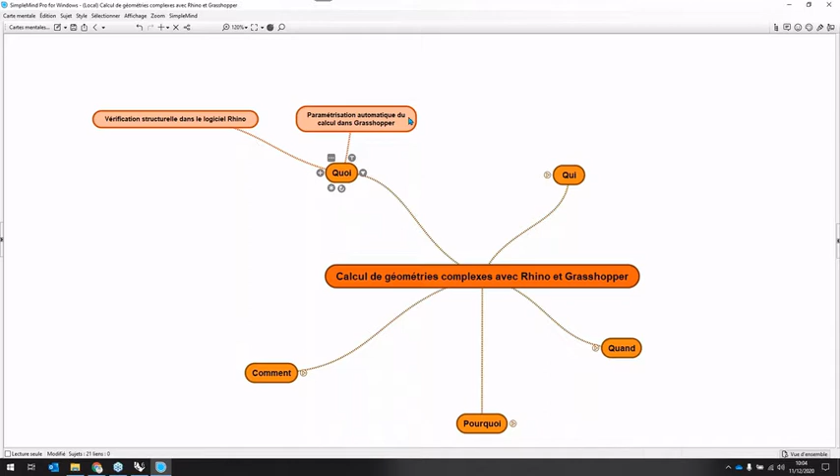On parlera aujourd'hui de Rhino et Grasshopper, donc la vérification structurelle et la modélisation dans Rhino, et les possibles paramétrisations automatiques pour le calcul dans Grasshopper.

À qui ça s'adresse? Ça peut s'adresser autant aux projeteurs, architectes, ingénieurs structure. Il n'y a pas vraiment de limite sur les différentes personnes qui peuvent l'utiliser. Autant pour la partie conception, par exemple pour l'étude de viabilité des structures, qui peut être assez intéressant, surtout avec les possibilités qu'offre Grasshopper.

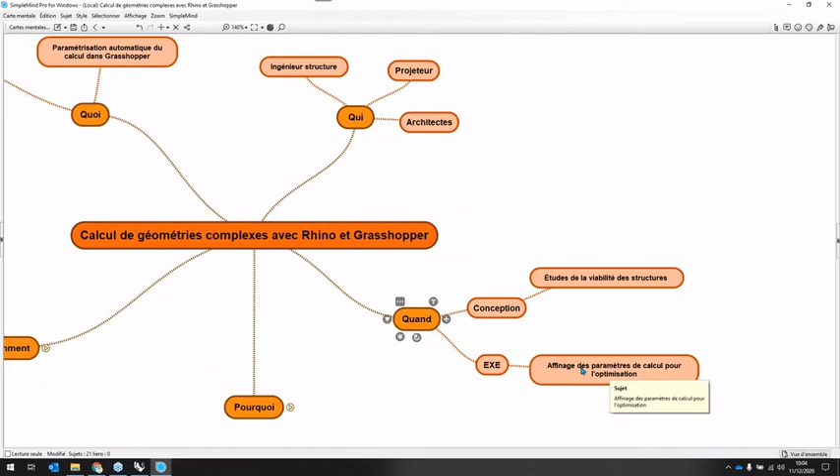Et en exécution également, souvent on le voit avec certaines passerelles, notamment avec Tekla, pour justement pouvoir envoyer jusqu'à la fab. Pourquoi? Souvent, comme on le sait, avec les logiciels de calcul, les modélisations des structures complexes peuvent être assez compliquées à réaliser des fois. Donc, certains outils comme celui-ci, qui sont surtout des outils de modélisation, peuvent faciliter ce processus.

Et pour la partie Grasshopper, de pouvoir souvent régler certains paramètres de calcul, notamment, comme on le sait tous, pour certains dimensionnements, surtout avec l'eurocode, on a divers paramètres qui interviennent. C'est bien d'avoir une certaine visu de l'impact de ces différents paramètres sur le calcul. Donc, ces deux choses peuvent être intéressantes pour le calculateur et pour le projeteur.

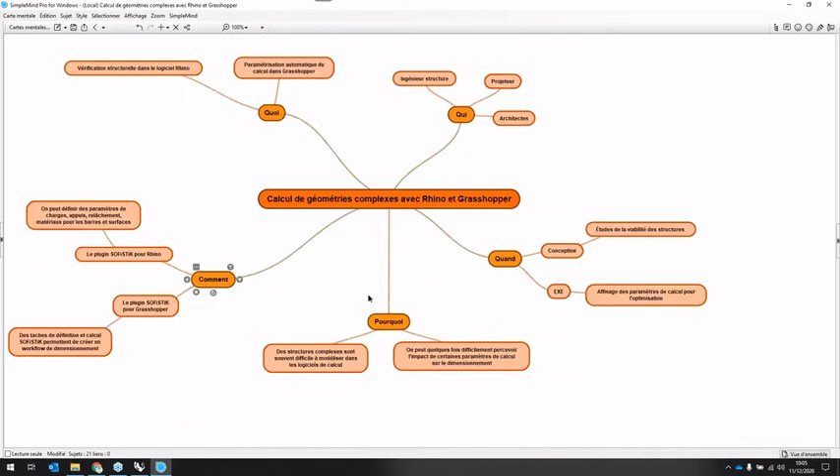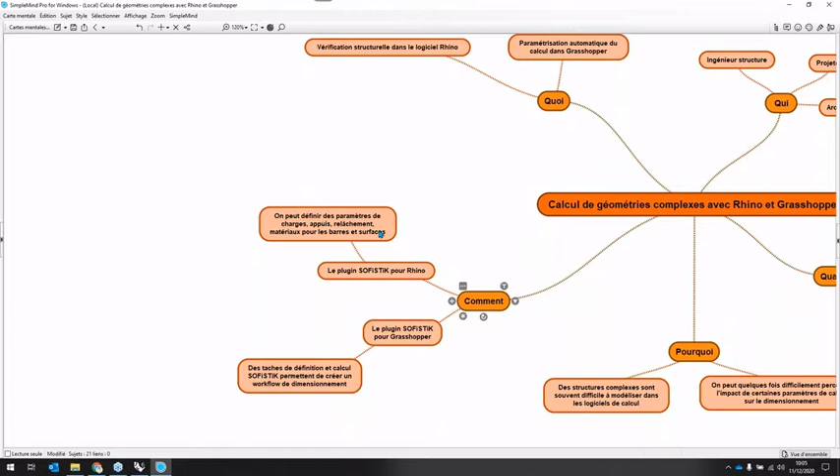Donc, ce qu'on va voir aujourd'hui, c'est comment le plugin SOFiSTiK intervient pour vous permettre de définir les appuis, les relâchements, les matériaux, donc les paramètres de calcul dans Rhino. Et également, dans la partie Grasshopper, que Xavier va vous expliquer un peu à la fin, comment certaines tâches ont été créées par SOFiSTiK pour faciliter cette démarche-là.

Juste une petite intro de Rhino Grasshopper, je ne sais pas si vous connaissez. Donc cette partie de l'écran, ça c'est Rhino, et ça c'est Grasshopper. Grasshopper, c'est un peu comme le mind mapping que je montrais, c'est un peu dans le même principe. Donc, pour faire vite montrer, si je change un paramètre ici, ça a un impact sur l'écran ici.

Ce que vous voyez là, c'est le ruban SOFiSTiK pour le calcul. Vous pouvez lancer cette géométrie-là directement dans le calcul SOFiSTiK. Ici, ce que vous voyez, c'est un peu l'écran de modélisation. Et là, vous avez un ruban qui suggère que vous pouvez définir les appuis et les différentes barres en section.

Donc ici, vous réglez le maillage, les différentes sections, les différentes propriétés surfaciques, etc. Et vous lancez le calcul vers SOFiSTiK. Donc c'est aussi simple que ça. Voilà.

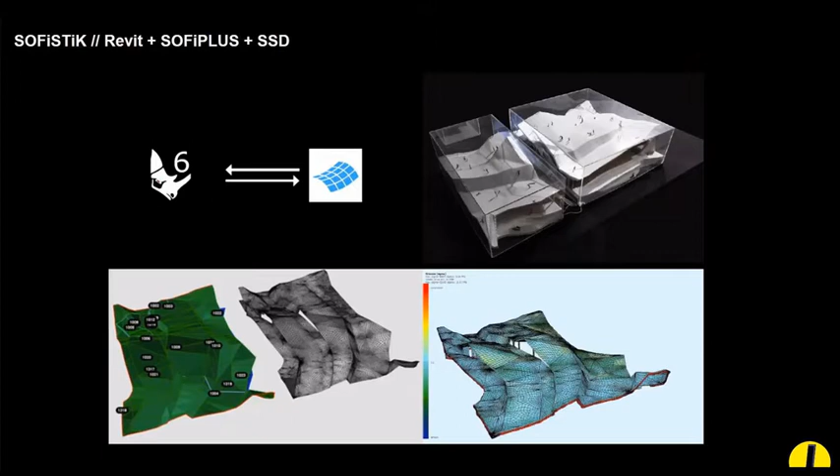So for the research part, we've gone through, first of all, Revit and SOFiPlus and SSD, and also integration between Revit and SOFiPlus. After that, we also integrated some complex geometry from Rhino and Revit and analyzed it in SOFiSTiK, because some of the complex geometry is difficult to analyze in Revit.

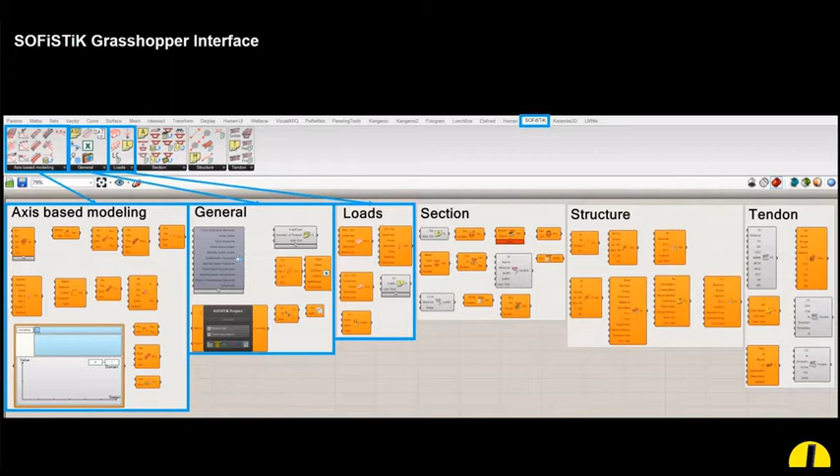After that, we jumped into Grasshopper components, and it developed quite a lot. As you can see, we now have about 6 major component sets that you can use to analyze from building scale to bridge scale. Grasshopper is like a Rhino interface where you can parametrically manipulate the geometry. Here I used an early stage Grasshopper component from SOFiSTiK, from 2018, April.

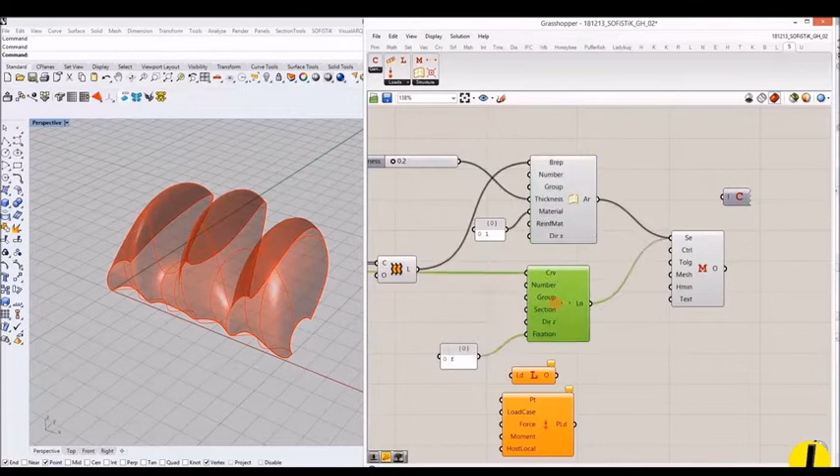So this standard Grasshopper geometry can be converted to an analytical model for SOFiSTiK with these components. As you can see, the Grasshopper geometry surface can be converted to a structural area, and we can define the thickness, give a group name or member number, and also define the support and member definition from Grasshopper. Here Grasshopper is really flexible - in real time we can manipulate geometry and define different parameters. It's a so-called parametric design tool.

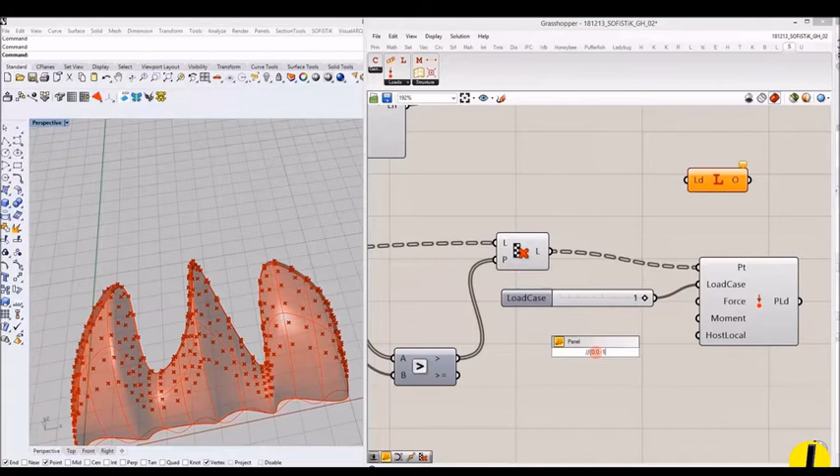Here I'm defining from those sets of points on a surface the lowest points on the surface so that we can get the support condition for SOFiSTiK. I'm filtering the points, and on one of the points I'm defining a load, then keep manipulating the geometry. After that, all this data can be transferred to SOFiSTiK's format, and we can insert the task in SSD, defining the design code, and define material and members. Here in Grasshopper we can assign it, and the exported extension format can be imported in SSD. With a text format, we can type 'include' and then the same file name in the same directory, and then you can calculate the geometry from Grasshopper.

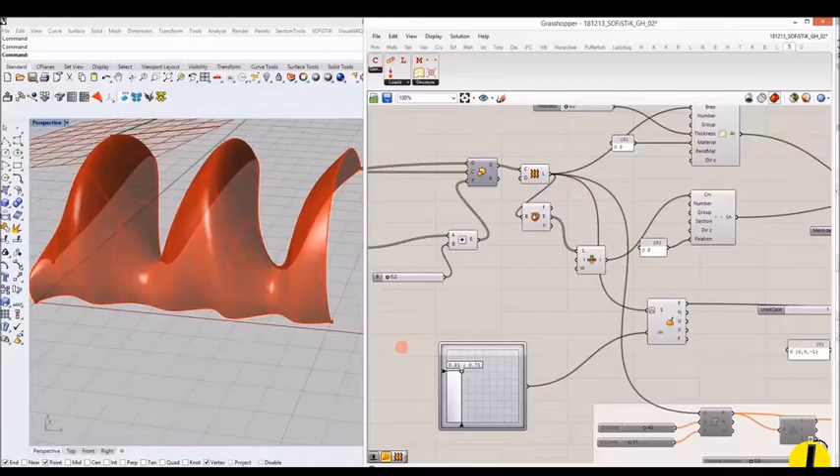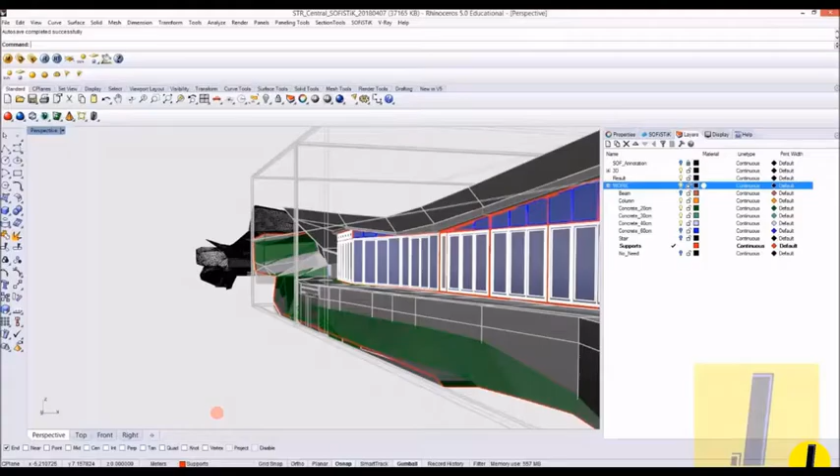At that moment I just gave a simple dead load, but we can also define point loads, and obviously define all kinds of flexibility using text input in SOFiSTiK or Grasshopper for different load case definitions. In this case, the model is very complex - it's my university project from 2016. I wanted to calculate it actually through Revit, but it was kind of impossible to do. So I decided to do it in Rhino and then get the analytical model, and through SOFiSTiK we could analyze it.

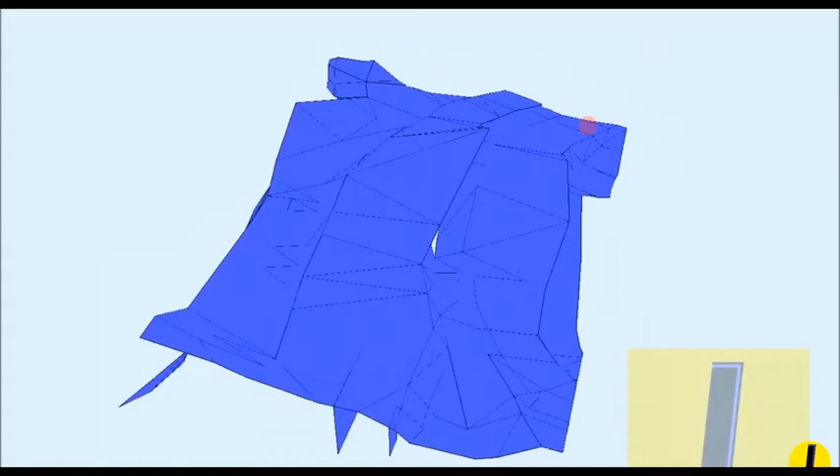I'm an architect, so I'm not really an expert in structural engineering, but at least I could see where the biggest deformation was when just applying dead load, and I could think about some design options to go further. So I think it's important to collaborate with a structural engineer as an architect, because otherwise we cannot achieve the architectural proposal we wanted to design. That's the reason why I started this research into parametric structural engineering. And SOFiSTiK was really good because I could get all this result very quickly from Rhino.

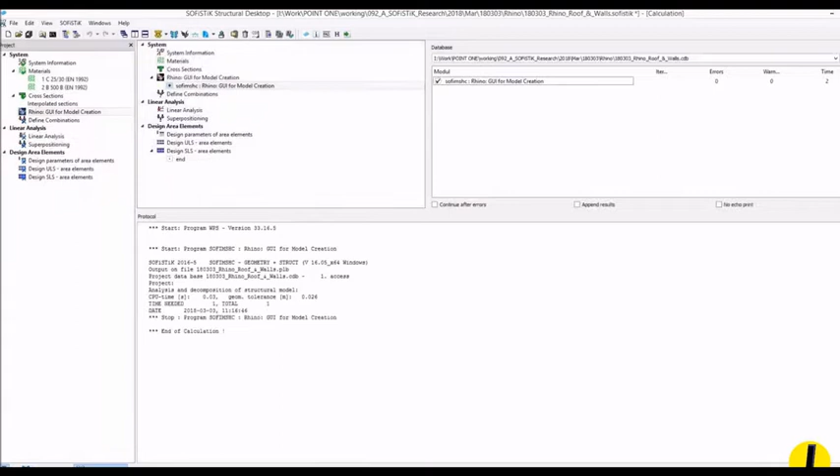In this example here, I have an analytical model from Revit, and this purple area - it was actually very difficult to get this structural analytical model out of Revit.

So I decided to model only that part in Rhino, and then bring the structural analytical model from Revit. We give linking same origin coordinate point from Revit and Rhino, and we link the same coordinates in SSD so that we can calculate both Revit and Rhino's analytical model within SOFiSTiK.

So there's huge flexibility with SOFiSTiK, because you can use multiple platforms such as Autodesk Revit or Rhino and Grasshopper, and you can also use something like SOFi Plus to define complex load cases or more engineering definitions for your calculation.

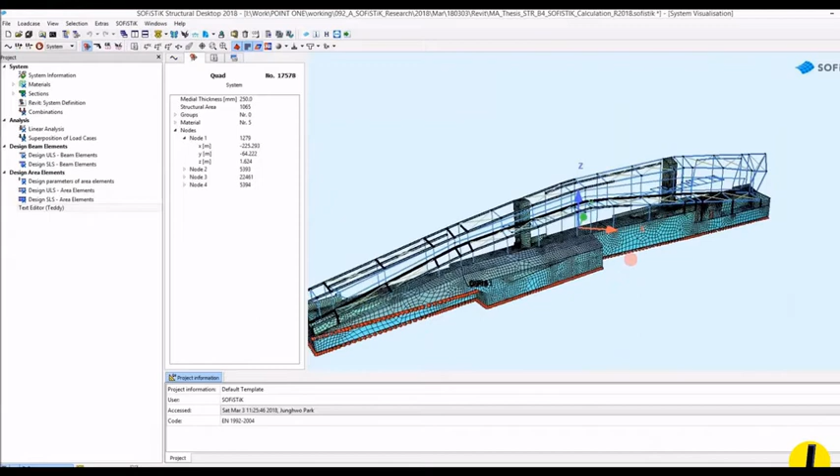The challenge was just to find the coordinate point, but once you thought about this workflow from the beginning, you can actually just link the same origin point between Revit and Rhino, and SOFiSTiK gives you really good results by combining those two different platforms.

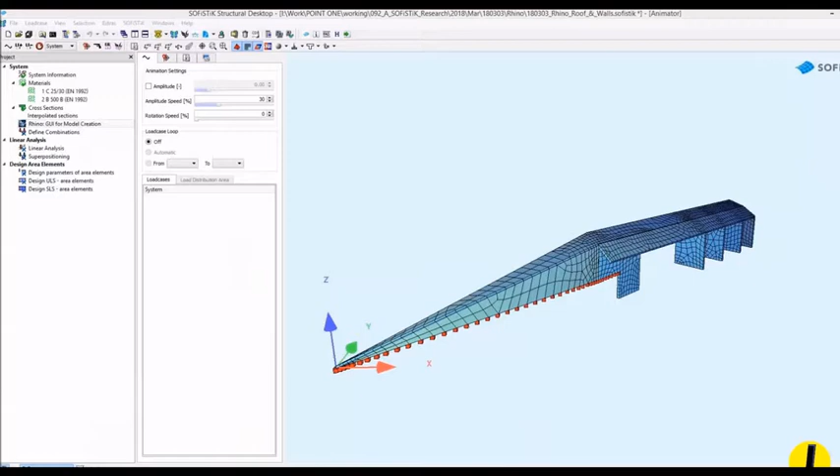And as you know, in Revit we can define more like the members' release condition or fixation, so you can do this sort of structural framing calculation more accurately. And then we summarize all the calculation in SOFiSTiK.

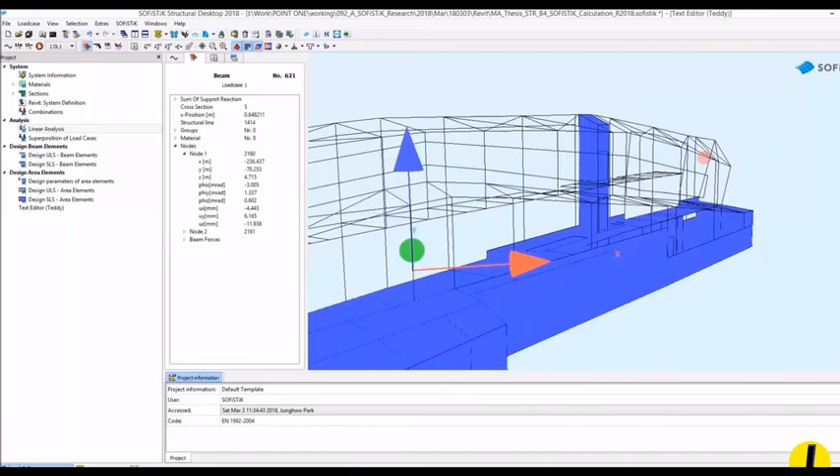So to me it's very interesting. Not only with designing a building as an architect, we can check the prompt result, and we can just definitely send this analytical model or collaborate with a structural engineer together without any difficulties. That was the main purpose of working with SOFiSTiK with Revit and Rhino.

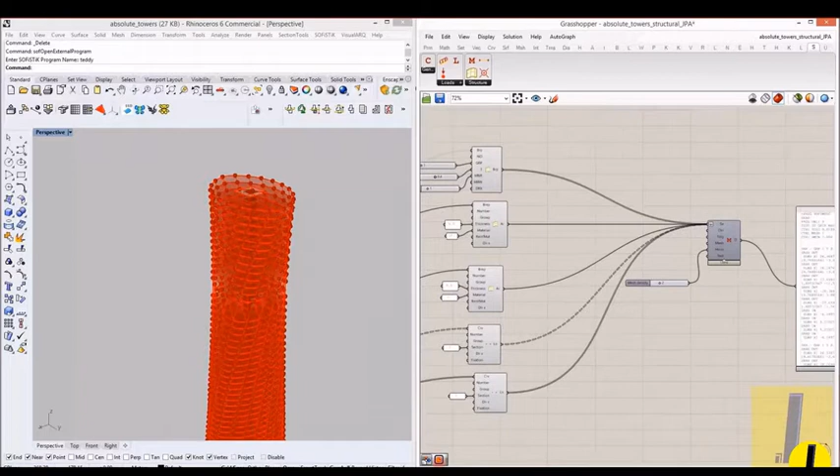So the next one, architects do a lot of conceptual design with Grasshopper. For this tower scheme, we could make this sort of small definition in Grasshopper, and in the SOFiSTiK Grasshopper plugin we just linked it, defined some dead load, and then could calculate it within 12 seconds. As an architect we can quickly revise, okay, maybe the core location there gives too much challenge for the structure.

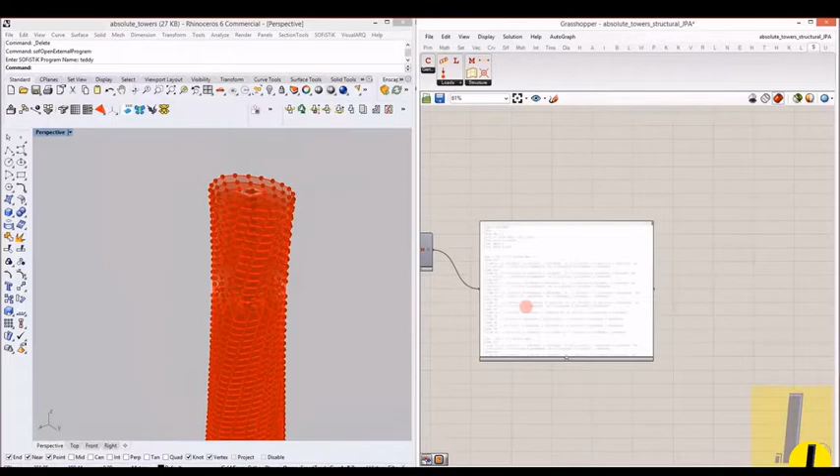Then we can also think about different design options. This is really great because in Grasshopper we can change this geometry simultaneously with a couple of sliders, and this feedback from SOFiSTiK is also fast, we just need to calculate once more, and then we get a completely different result.

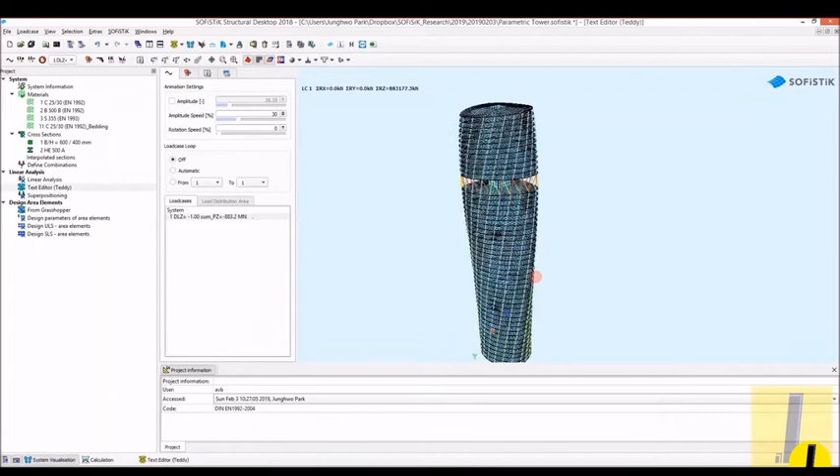So we just shift the core location a little bit and then analyze once more the dead load, and I can get a different sort of structural behavior. It's very rough, but for the conceptual stage, we can also think about that.

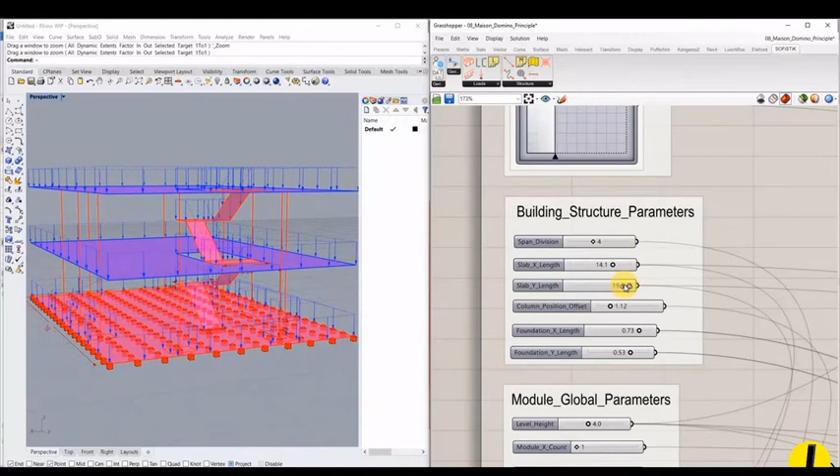And now here I'm introducing Rhino 7. They have this Rhino.Inside.Revit, which means we can parametrically design the building scheme or bridge scheme in Grasshopper, and that analytical model we can obviously parametrically adjust what we need, support condition, footings and stairs, and different building height, or this modular system from Le Corbusier's Domino system, so we can array this building scheme for multiple residential buildings.

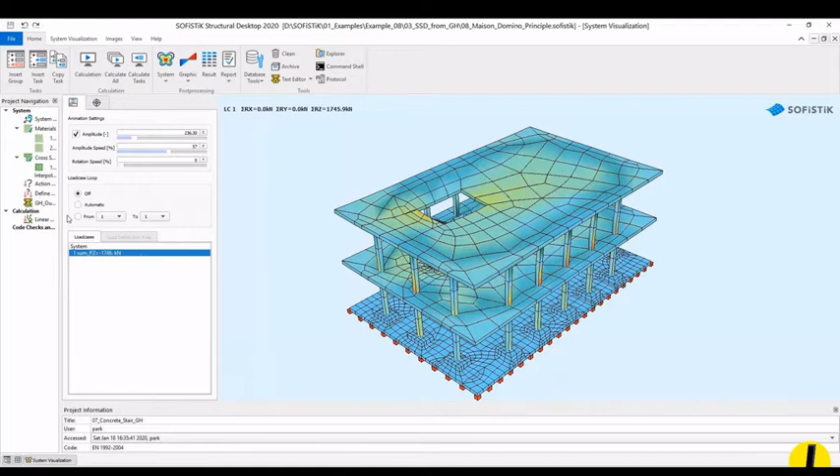And with Rhino.Inside, now the SOFiSTiK result we can also convert to native Revit components. So here I'm going to activate the synchronize file path component for SOFiSTiK, and we can also analyze the result from Grasshopper. I just gave a dead load, so you can see the result, and we can use the normal SSD function for display and visualization.

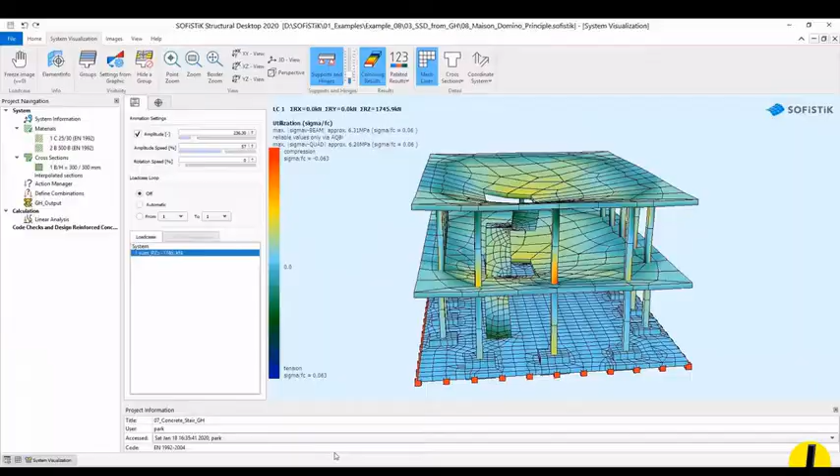And now I'm just going to calculate a modular system as a sort of unit apartment scheme. When I calculate in SOFiSTiK, you can see, so we just need to recalculate this text input and linear analysis, and you can get the whole building scheme in very fast time, and it works really perfectly.

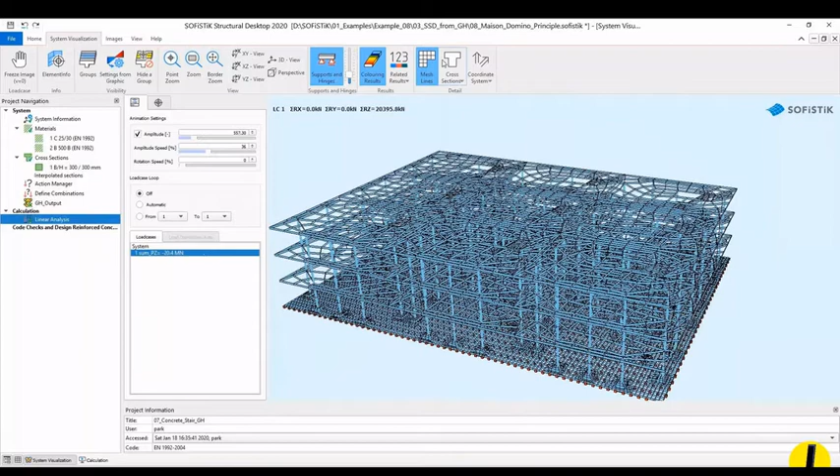So this result, now we can also send it to Revit directly, so the construction team can document the initial calculation model in Revit, like plans and sections.

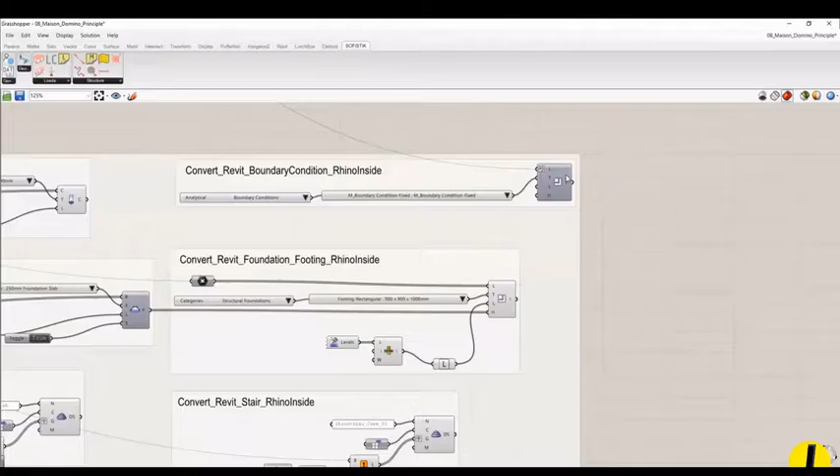So now let's say we're interpolating the geometry from Grasshopper to Revit, and I just recompute, so we remove the error, and you can see we now have whole native Revit components, which means floor slabs and foundation columns, etc., which is great.

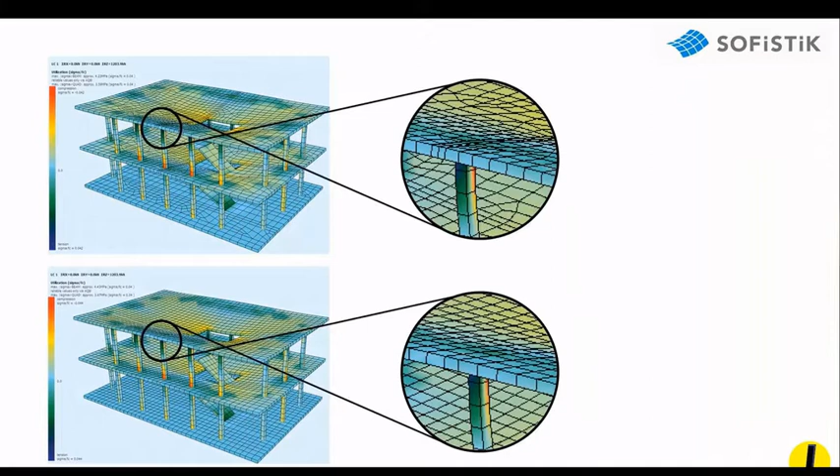And here I had researched that the meshing was a little bit complicated, so we wanted to optimize the meshing geometry out of Grasshopper, so we can have faster calculation speed and also more reliable meshing geometry.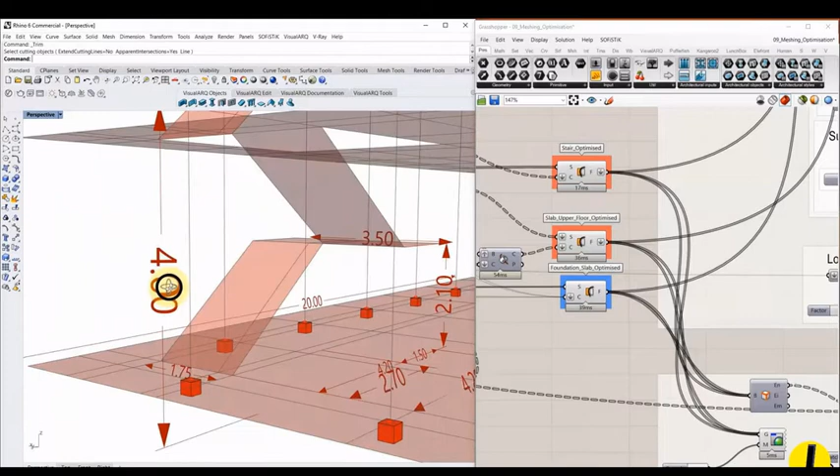The idea is that at any intersection between the geometry, we need to split the geometry. So if you do the automatic option or single quad or regular options, when we split at all the intersection points of the geometry, we can use the regular option so that we have really good optimized meshing geometry. In this case, it's difficult to manually do it when design changes evolve quickly.

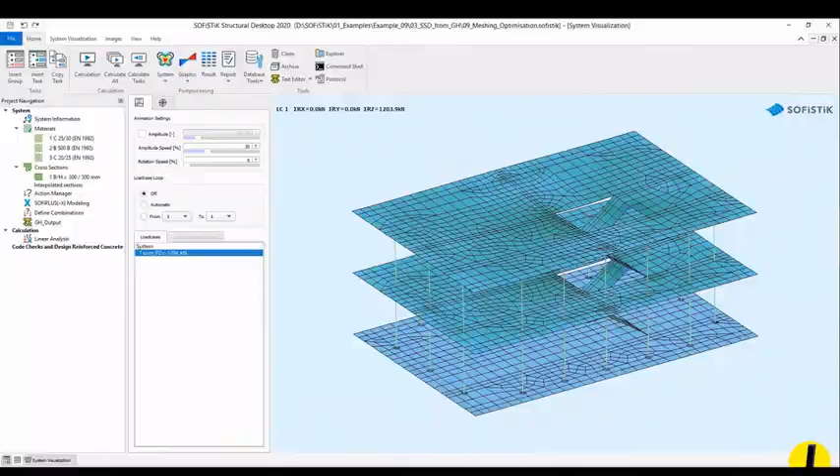With Grasshopper, because of the parametric function and computer-scripted geometrical definition, any changes automatically update. We can have a look at the single quad option instead of automatic quad option, and you can see now the mesh is much simpler, and the calculation speed is really quick because right now we're looking at only one module.

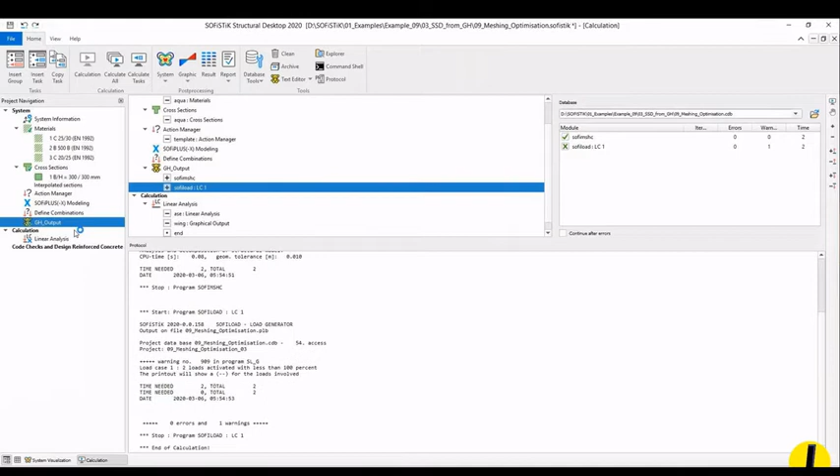So it doesn't take much time for the automatic option, but when you have a bigger scheme, this optimization of meshing could be very useful. I think Grasshopper and Rhino give you really flexible options to optimize this meshing geometry.

So you can see here the regular meshing options. As you can see, the calculation time is also fast, and we can give a bit denser property for the meshing typologies. As you can see here, now we have every 50 centimeters with a quad mesh, so you can see more detailed calculation. But the point is the mesh is really clean.

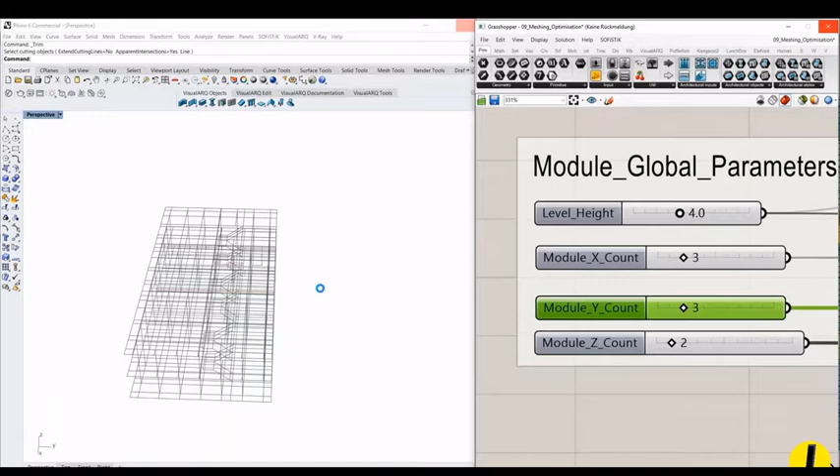Now I'm going to make the building scale bigger with multiple stories. This modular system can be seen where all the intersections split. Now we just do one more time automatic calculation, and you see it still works, but the mesh between the modules is very messed up, not very good meshing geometry.

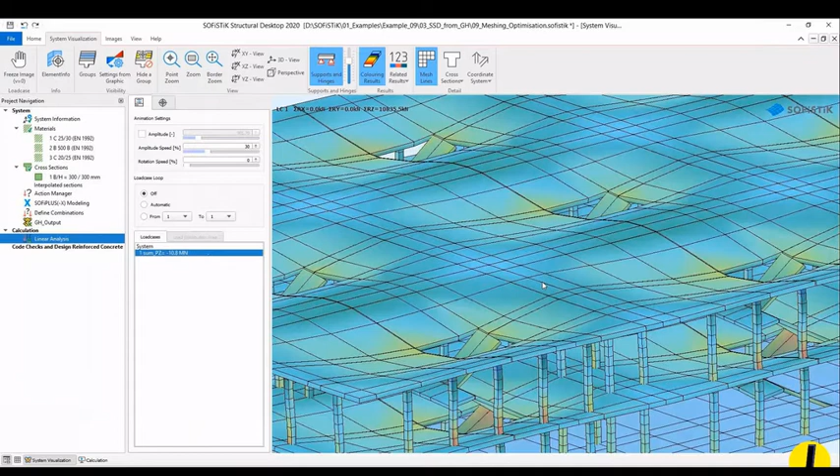But once we make it a simple quad, of course the calculation time is much faster, and the geometry is also cleaner, but maybe the single quad doesn't give you the accurate result.

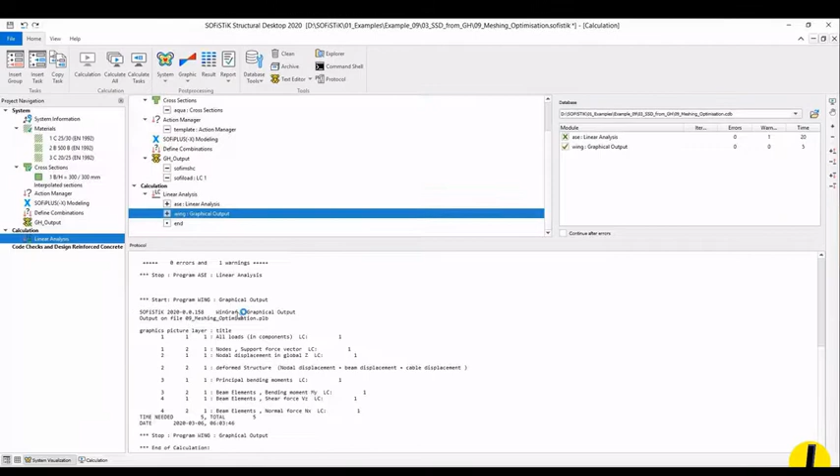So the best option is to use a regular meshing geometry option, and the mesh density we can always control from the Grasshopper component. Now when I recalculate, we get very organized results, and between the junctions you can see there's no such complex meshing drama. So we get a really good result, and also the calculation time is fast.

So now I'm showing some of the projects from Point One Studio. We worked on this steel and timber structure in Australia. The architect was OSC Architects, and we collaborated with them and designed this small single family house.

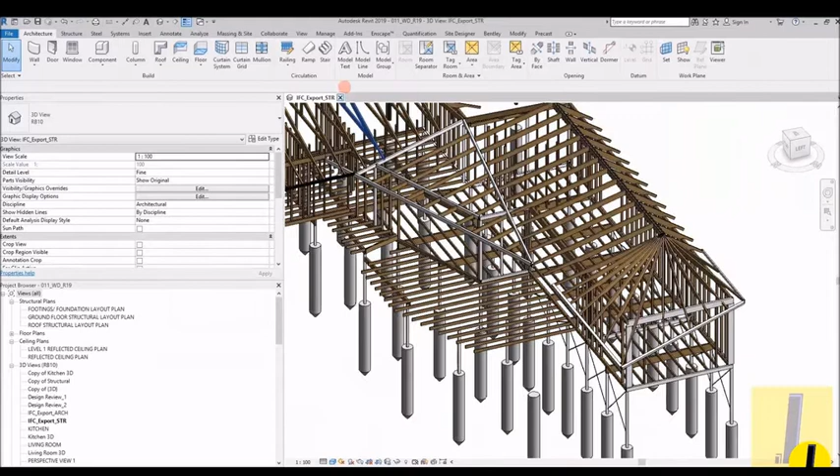At the time I didn't use SOFiSTiK, but I was just thinking, okay, maybe this whole structure we could have calculated at the initial stage in Grasshopper, so we can have more design variation to come up with the final design. So I scripted it in Grasshopper.

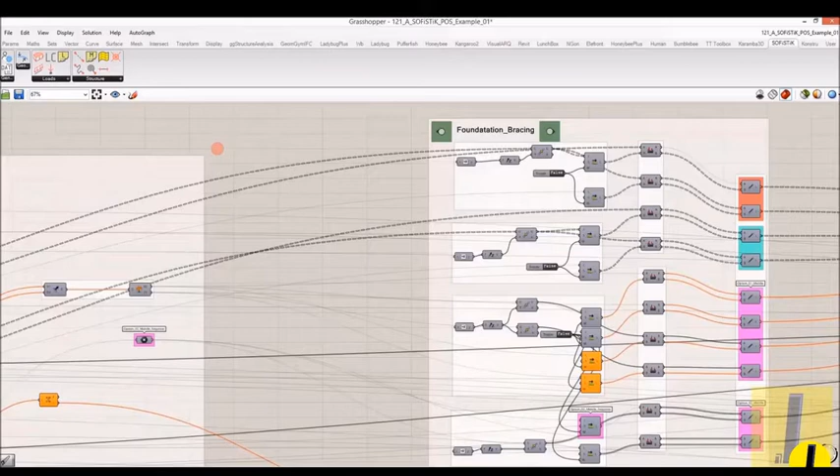As you can see in Grasshopper, we can change all the parameters completely, like the building height, etc. All the data is structured, so for each building component you can jump to the main script to define foundations, and from foundation you can define supports, and organize it graphically. It's just a matter of some organization, but nothing complicated.

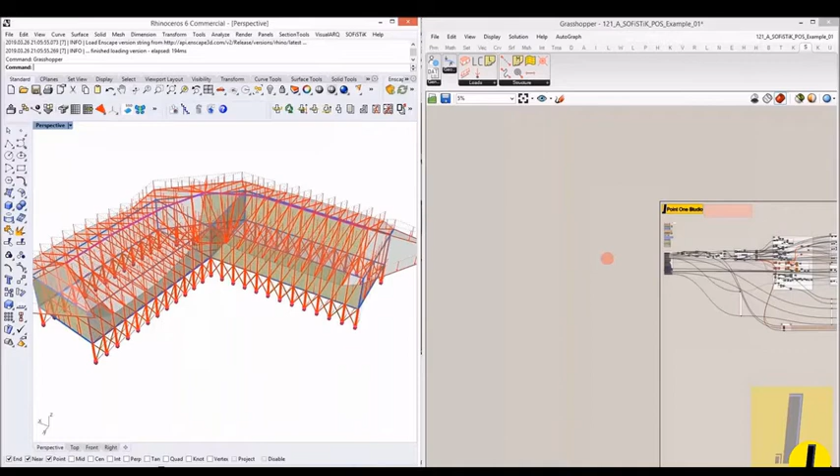Finally we connect all this geometrical definition to Grasshopper for SOFiSTiK, and once your design options are satisfied, I can give two different options here. One is wing rotation change, and as you can see, the pitch or canopy on the corner is also giving you a different option. Obviously we can change the height of the building parametrically.

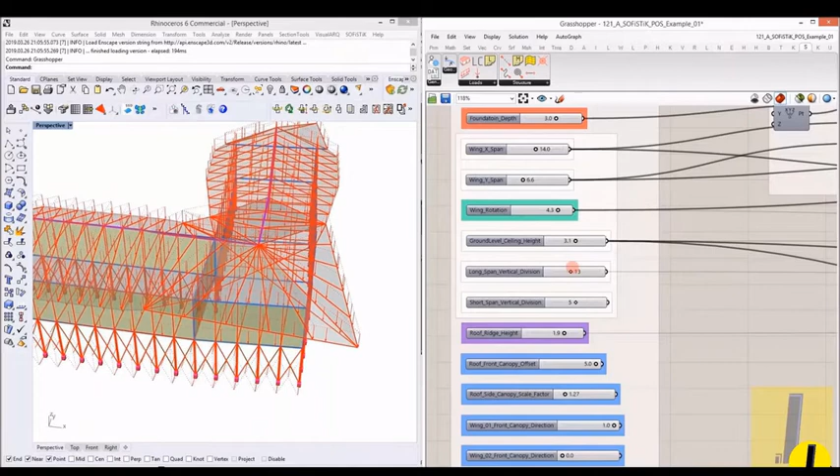And the foundation depth, and all the divisions for the structural division, and the ceiling height we can also change.

So this is a very typical case study for Grasshopper, but it's really powerful because the SOFiSTiK calculation result can simultaneously update. Here in the Grasshopper component, you can set as many parameters as you want, and this data set is less than 10 megabytes.

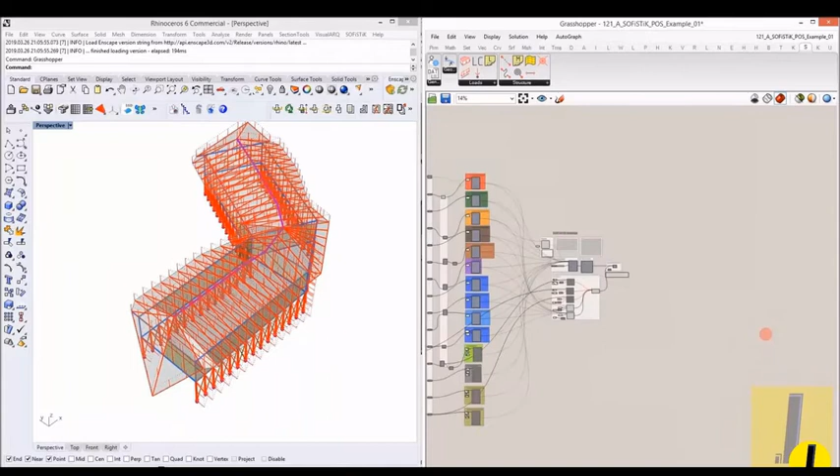So with this Grasshopper definition, you don't need to worry about many parameters. It's just a matter of how you organize your script, and how you can communicate between architects and structural engineers. Once I'm happy with the final design scheme, I'm just sending the...

...extension, the DAT extension file, in the same metadata folder from SOFiSTiK. So now let's have a look. Yeah, the scheme is fine.

So here I put the text input, referencing that .dat file extension from the same directory, and I calculate. In this case, the load was applied from the Grasshopper component, so you don't have to write SOFiSTiK text input for the load definition.

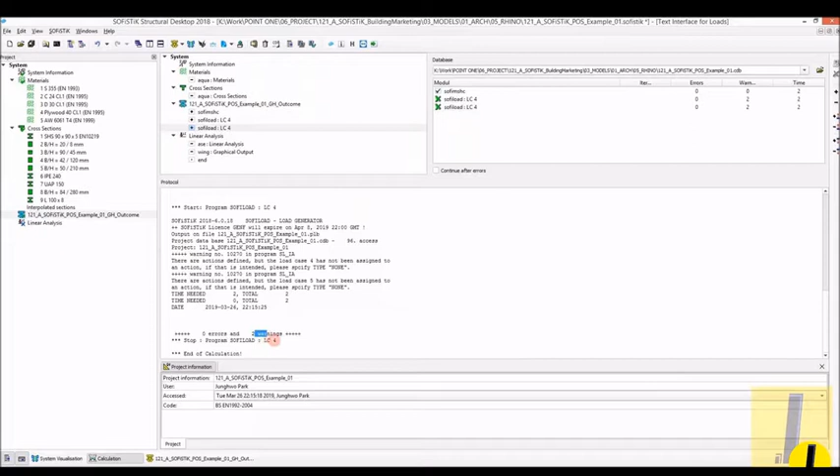There are two minor warnings, but it's fine, just warnings, not errors. We can calculate now: linear analysis, ASE, and then WinGRAF. Let's have a look. You can see the two different load cases delivered from Grasshopper to SOFiSTiK, so you can get the calculation.

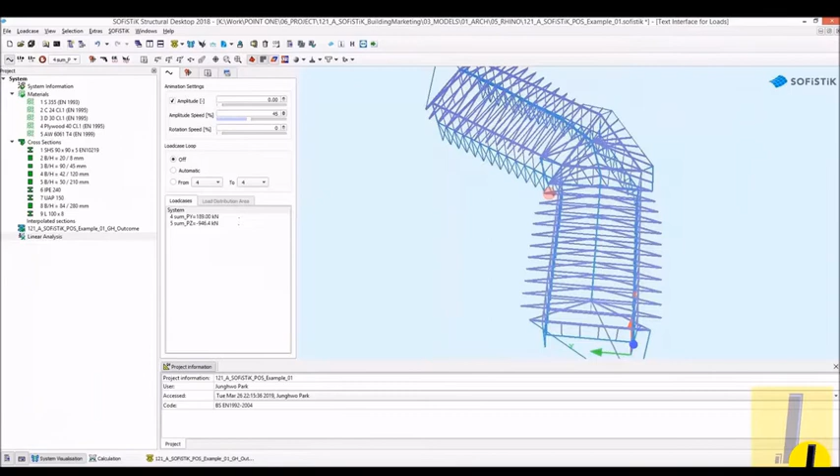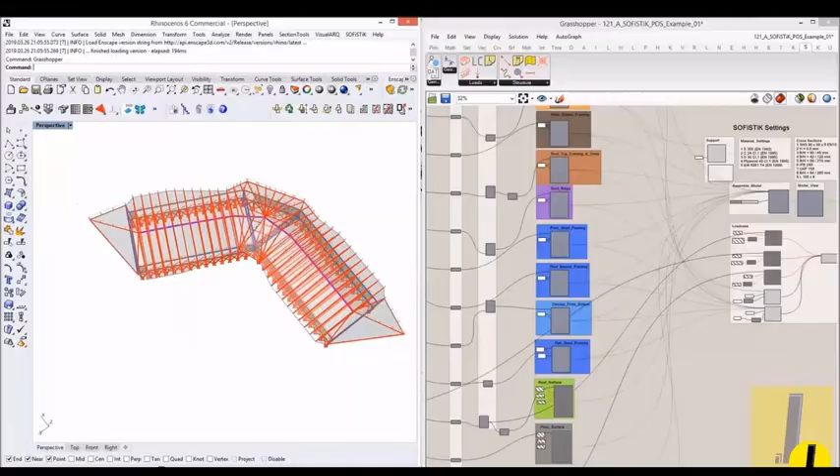Perhaps I can just send this Grasshopper definition to the structural office, and they can quickly have a look at the structural result from SOFiSTiK. If they say, okay, this is not good, we have to change this, then they could also directly change the Grasshopper definition as a structural engineer. Then as an architect, we can get comments from the structural engineer and revise our design accordingly. So there's huge potential for collaboration, where both architect and structural engineer use this Grasshopper pipeline together, making collaboration very efficient.

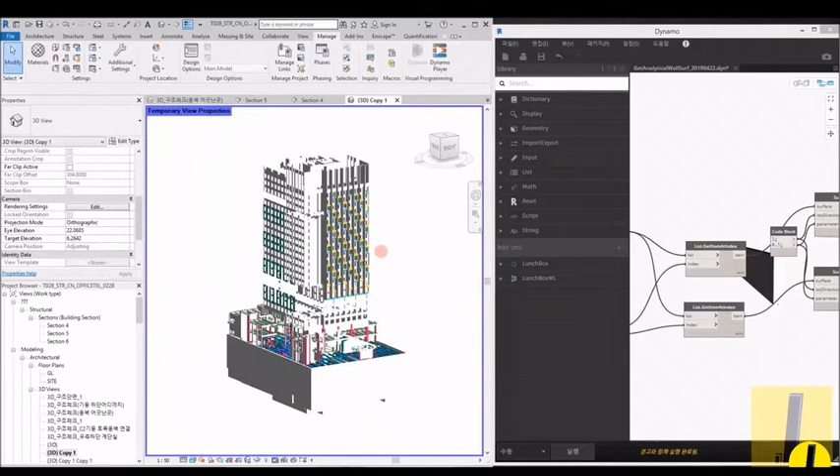Another project I was working on with M2A architects in Korea was a multi-residential building, a typical reinforced concrete structure. I didn't use SOFiSTiK for that project, but while researching SOFiSTiK AG, I was interested in how I could use an existing Revit model to calculate in SOFiSTiK. It was quite difficult using Revit itself, because it has many building stories, and amending the analytical model in Revit takes a lot of effort.

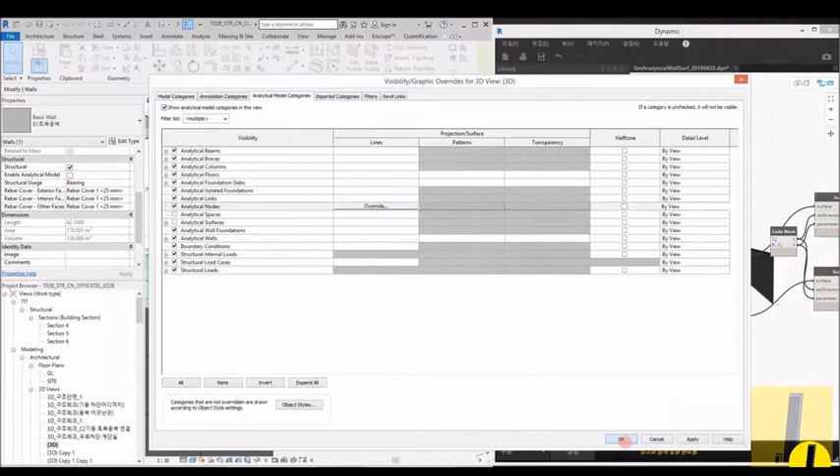So I decided to organize the model to use in the Rhino interface with SOFiSTiK, so I could simplify the structural framing, walls and floors using Dynamo, which is a visual scripting interface for Revit. There we can extract the geometry, simplify it, and eventually export this Revit geometry to Rhino.

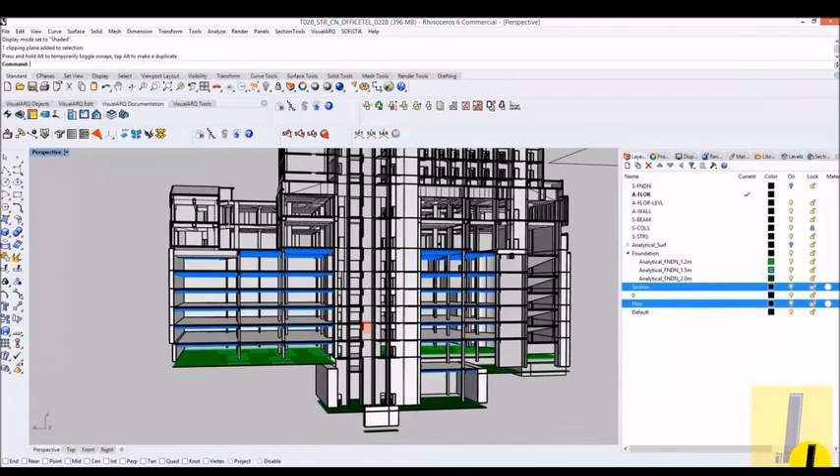I organized the layer structure from Revit. This is, let's say, a structural model that I need to convert to an analytical model to use in SOFiSTiK. So I could simplify wall thickness and align the center of the surface to get an analytical model out of this wall.

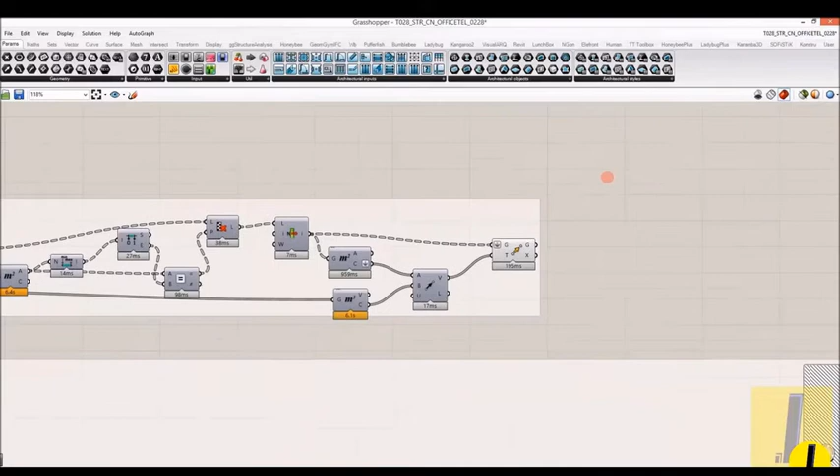This was done using Grasshopper - just standard Grasshopper, but we could define all the building components to convert to the analytical model. Obviously not every analytical model came directly from Grasshopper output - I had to manually adjust in Rhino, but it's still much faster and more efficient than working in Autodesk Revit for this case, because there's not much constraint for the analytical model.

So as you see, the organized analytical model - for this podium area I tested it with SOFiSTiK from the Rhino interface, and it actually worked quite well. This research was quite satisfying, and there's huge collaboration potential between Rhino, Grasshopper, Revit and Dynamo.

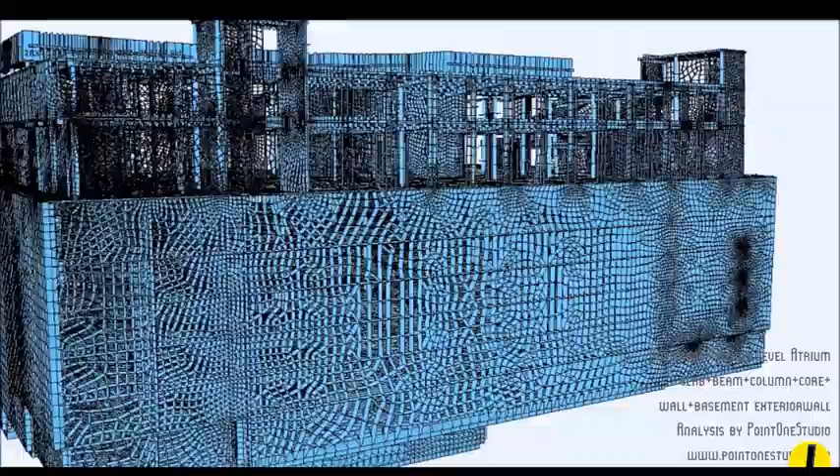As far as I know, SOFiSTiK also has a Dynamo package where you can read results from SSD into Revit and display or visualize the result there. I'm hoping to have a research result in the future where I can use a Revit model, through Dynamo or Rhino Inside Revit - which is a Grasshopper plugin for Revit - and get results out of SOFiSTiK in Grasshopper or Revit.

Here's another example - recently I tested Rhino 7's SubD. SubD is like a flexible geometry between NURBS and mesh. Here I'm defining a volume geometry for SOFiSTiK.

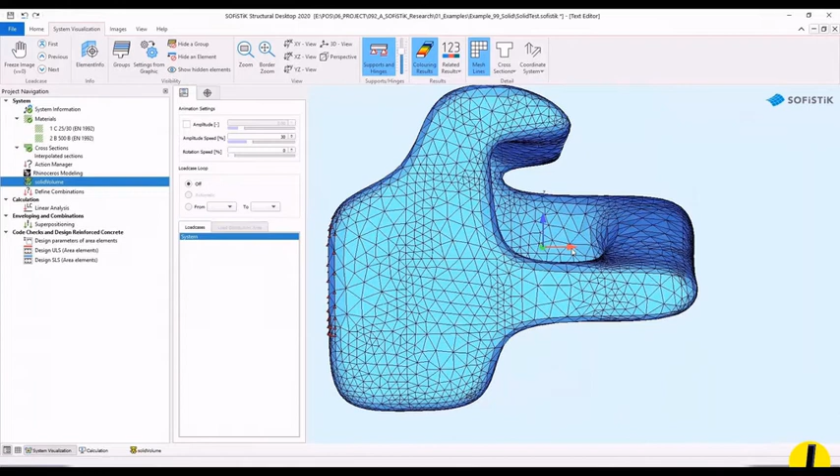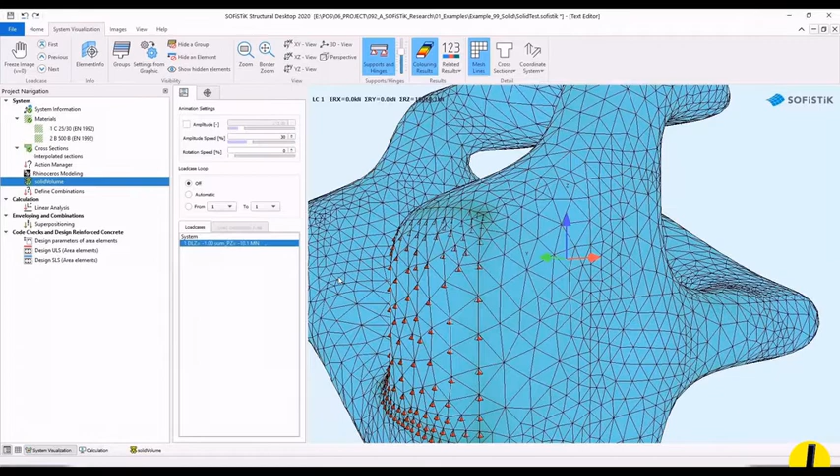Here we define part of the volume geometry as a support condition, and then we calculate this volume geometry in SOFiSTiK to get a result. This SubD geometry is very interesting because we can easily manipulate organic geometry shapes in Rhino, and then convert this volume or solid geometry from Rhino to work in SOFiSTiK as a volume geometry, applying concrete structure properties to see how it works.

So far the workflow is really smooth and doesn't have any difficulties. I'm expecting to make a tutorial or something on my YouTube channel soon for this Rhino 7 subdivision to SOFiSTiK workflow.

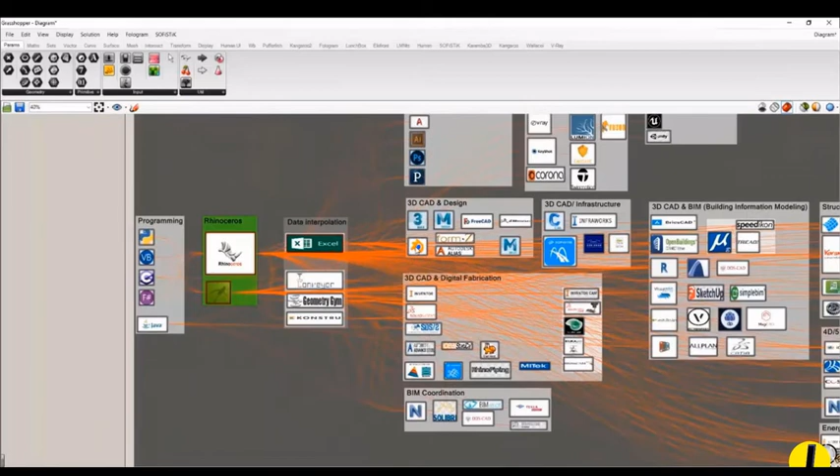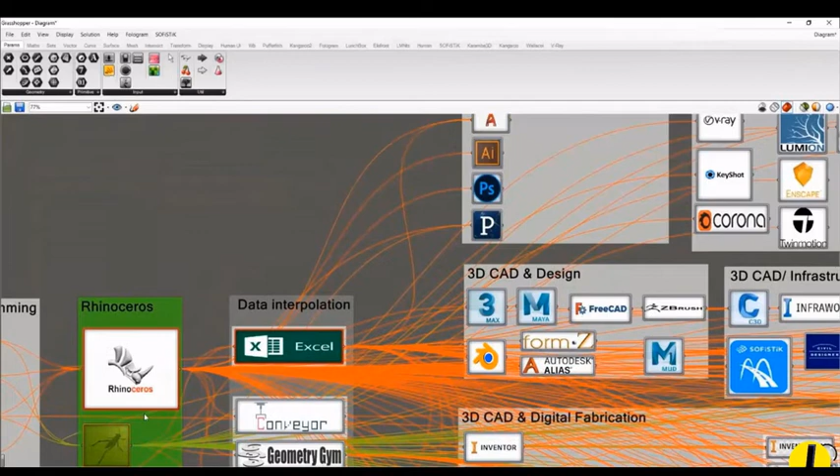To summarize my presentation today, Rhino is really eco-friendly - it has a huge plugin ecosystem and community, and you can use your own programming such as Visual Basic, C#, F# or Python, and integrate with many plugins such as Conveyor or Geometry Gym, Konstru, or Excel files as a data interpolation tool. You can also link to 2D graphic interfaces or use rendering software.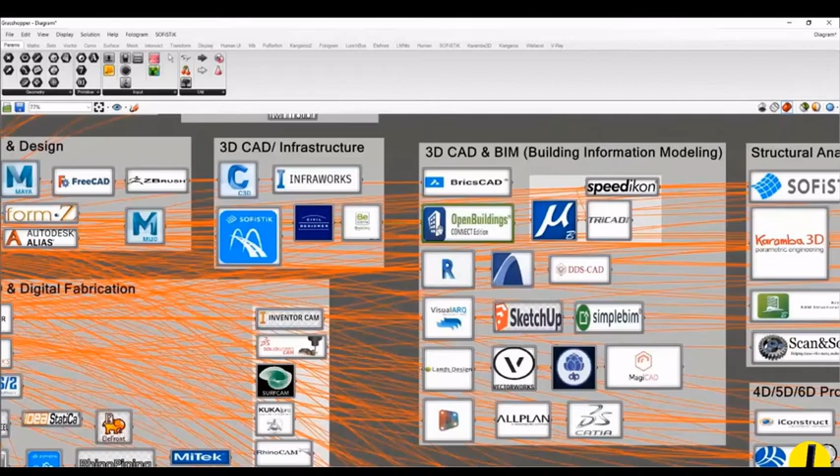So you could design something, calculate it, and eventually render or display it in a game engine such as Unity 3D or Unreal. You can also send it to 3D CAD infrastructure software, or many BIM authoring software such as Revit, ArchiCAD, or SketchUp, and there are many plugins that let you export your Rhino model as an IFC model so you can continue the parametric model in such BIM applications.

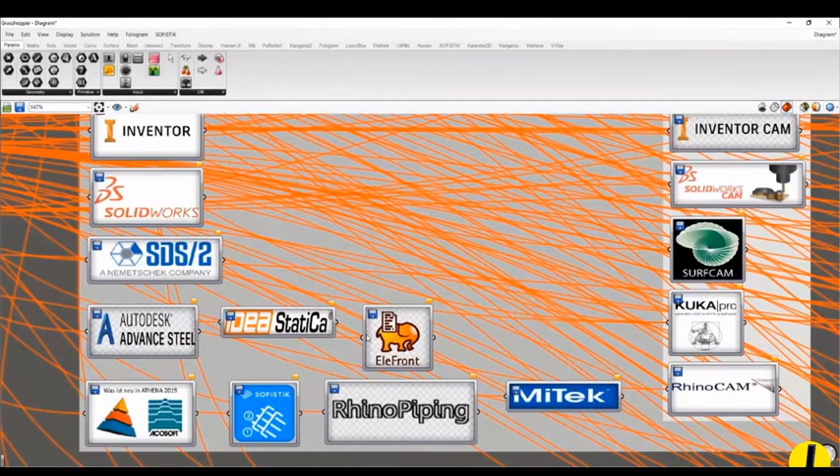You could also use your model for digital fabrication, using robots or milling machines with specific software, so you can actually realize your final BIM model through Rhino to fabricate it.

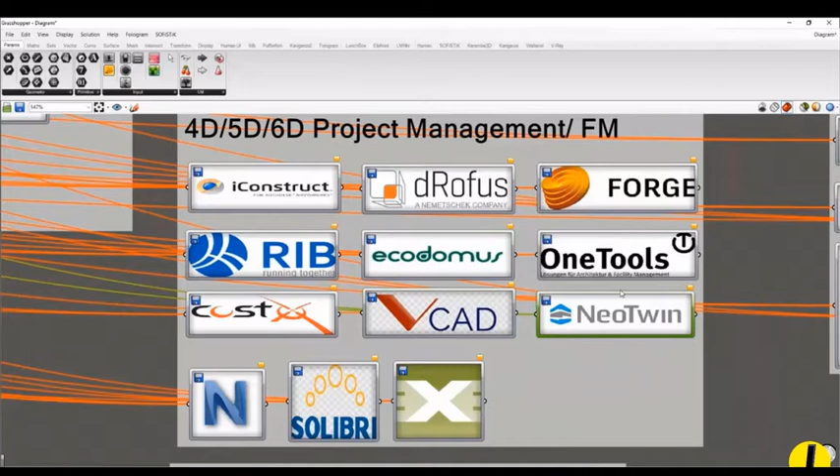There are also many BIM coordination tools linked to Rhino and Grasshopper, and you can use different structural calculation software, not only SOFiSTiK. You could initially use Karamba 3D to calculate, then transfer all the data to SOFiSTiK to make a more detailed calculation. Or you could also use energy simulation.

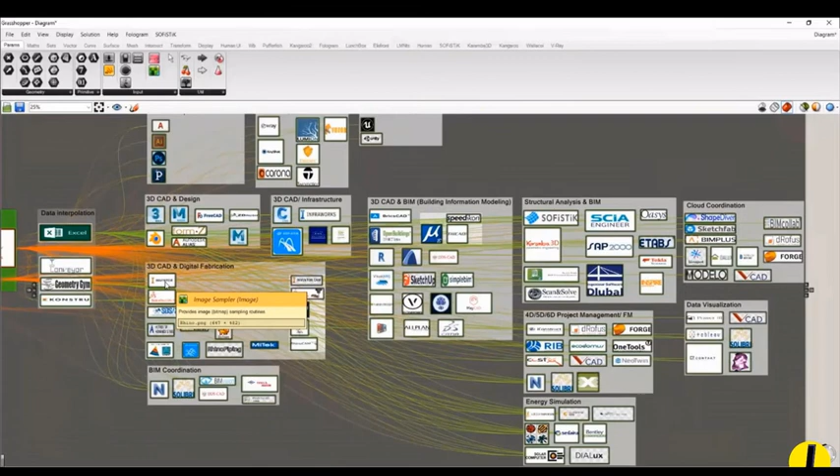The point here is not to show all the potential, but the flexibility and collaboration opportunity between different disciplines, because the building industry is huge, with more than 50 different disciplines working together. If you can have this kind of ecosystem platform where everyone can collaborate and eventually realize a building that we can use for facility management, that would be a dream for everyone.

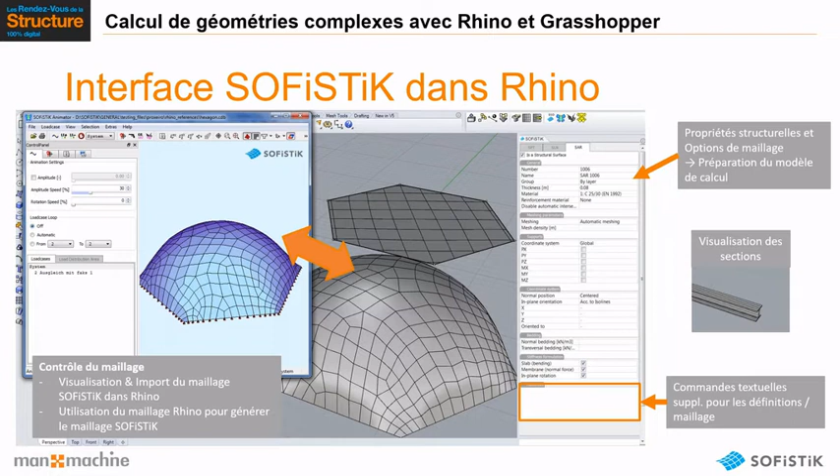On le manipule à travers des paramètres, mais on peut les visualiser dans Rhino. Ils sont connectés à des blocs de définition qui sont spécifiques à la partie calcul, donc vraiment spécifiques à ce que SOFiSTiK sait faire.

Et vous avez notamment des outils, parce que nous on fait beaucoup de ponts, on en a parlé hier, des outils qui sont très spécifiques au pont. Mais tout ça, après, va pouvoir être transféré de manière très facile dans l'interface de calcul.

Et ça veut dire que quand je suis dans une interface de calcul SOFiSTiK, d'un point de vue du calcul de l'ingénierie, pour moi il y a une transparence totale entre si j'avais fait cette modélisation dans AutoCAD, dans Revit, ou dans Rhinoceros, ou dans Grasshopper. C'est juste une information de définition que je vais venir récupérer et sur laquelle je vais pouvoir rajouter ensuite mes informations de calcul linéaire, calcul non linéaire, du phasage, de l'analyse de trafic, du dimensionnement, etc.

Mais comme on a désormais une interface qui est une modélisation paramétrique et qui est très accessible avec Grasshopper, à la fois à l'architecte et pour l'ingénieur, ça nous permet à l'architecte de pouvoir facilement reprendre des commentaires qui lui sont envoyés par l'ingénieur et d'étudier quelles sont les variantes qui pourraient être intéressantes, ou à l'inverse, pour l'ingénieur, de dire, bon, je vois dans mon calcul qu'il faudrait que je regarde une variante.

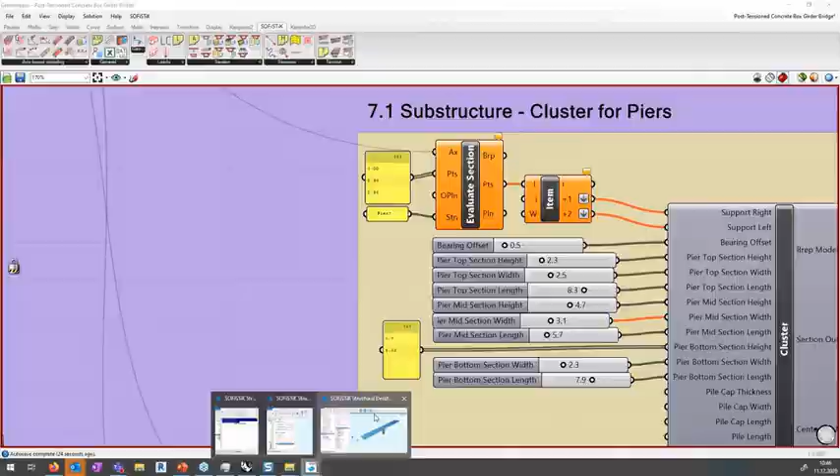Donc ça fait justement que, par exemple, l'architecte peut un peu travailler, étudier, notamment via la prévisualisation qu'il fait dans Rhino, étudier l'impact que ces paramètres ont sur la géométrie, et au moment où cette géométrie est finalisée, récupérer les définitions via l'utilisation des fonctions de SOFiSTiK pour reprendre ces définitions complètes, géométrie plus propriété de calcul, et ensuite relancer le calcul pour voir l'impact final sur notre structure.

Et comme on l'a vu, l'idée aussi c'est d'avoir des workflows qui sont relativement ouverts. Grasshopper, Rhino sont capables de s'intégrer aussi avec les objets de Revit. Ils sont capables de s'intégrer avec différentes fonctionnalités, il y a un grand nombre de plugins disponibles. Donc comme on l'a dit, il n'y a pas juste SOFiSTiK comme outil de calcul, il y en a d'autres, mais il y a aussi toute la partie production.

Et c'est donc l'idée du BIM, vraiment, qui est de mettre en commun des informations et d'ainsi pouvoir optimiser le partage de cette information, et de dire, voilà, on a une information géométrique qui est réutilisée pour du calcul, mais aussi cette information de calcul peut ensuite avoir un impact sur la production, etc.

Voilà, pour ma partie, comme je le dis, Yungo a vraiment tout très bien expliqué, il n'y avait pas grand-chose à rajouter. Donc j'espère que mes petits commentaires vous ont aidé à mieux comprendre le concept de l'utilisation de Rhino et de Grasshopper en interface avec SOFiSTiK.